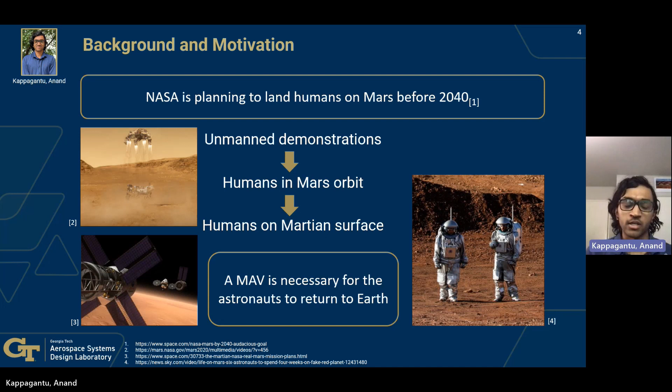A little bit of background and motivation for this project. NASA is planning to land humans on Mars before the year 2040. Prior to that, some of the steps that need to be completed are to show unmanned demonstrations for feasibility proof, and then getting humans into the Mars orbit, and then getting humans from the orbit to the surface. To complete this mission, we will require what's called a Mars Ascent vehicle in order to bring the astronauts back from Mars to the surface of the Earth.

Some of our key stakeholders that we identified are primarily NASA, the scientific community, and ESA, and overall their needs lie around generating crew liftoff capabilities from the Mars surface, having a certain minimum payload capacity, ability to return samples from the Mars surface back to Earth, and communicating between Mars and Earth in order to maintain survivability.

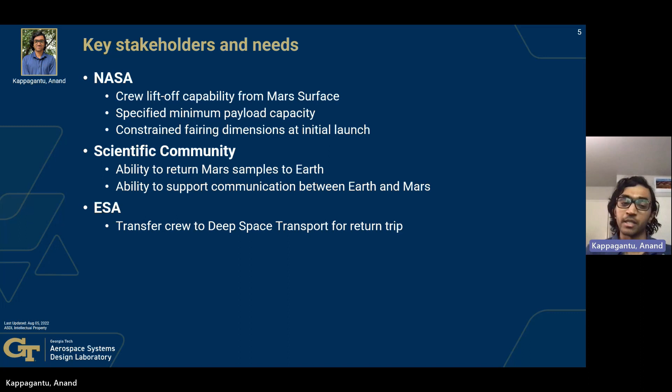Some of the current designs for similar missions that are available: we have the SpaceX Starship, the Lockheed Martin MADV, and NASA's own MAV. Some of the common themes that you'll notice here is they all have in-space refueling, but one major drawback is that they do not have autonomous surface propellant transfer. For this project, we will be focusing on developing an autonomous system for propellant transfer on the Mars surface.

So the way we plan to do this is to take two landers to the surface of Mars that land a certain distance apart from each other. And this would happen 2 years prior to astronauts' arrival on the Mars surface. So we would use that 2-year window to construct a fuel transfer between what we're calling Lander 2, carrying the fuel, and MAV, which will lift off astronauts from the surface.

So here's our concept of operations. We have Lander 2 approaching the Mars Ascent vehicle, which would take about a 6-month window depending on the distance they land from each other, and then build a connection for propellant transfer, then actually transfer the propellant, perform safety checks, and separate the landers before it goes into dormancy mode, waiting for the astronauts to arrive. These phases can be monitored from mission control on Earth.

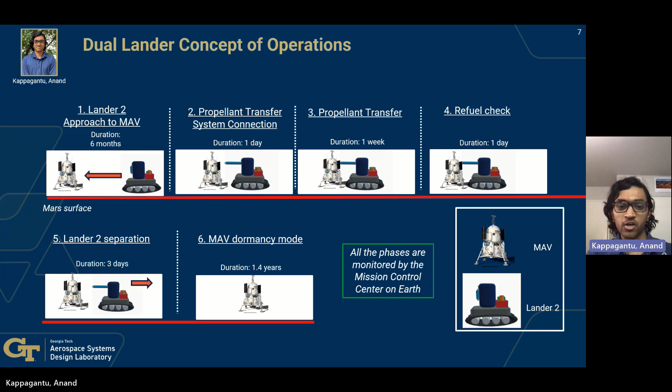To support our decision, we followed a systems engineering methodology to identify requirements, draft out QFD findings, identify potential solutions, trade off solutions, and make our final decision. You will see all of these steps covered through the presentation today.

Some of our high-level requirements that I would like to touch on are here in our requirement flowdown diagram under mission specifications. The key ones here are our payload capacity needs to be able to carry 2 crew members off of the surface of Mars, and the Lander 2 needs to be able to travel to the Ascent vehicle and transfer fuel, and we would like to keep them both under a combined weight of 25 metric tons.

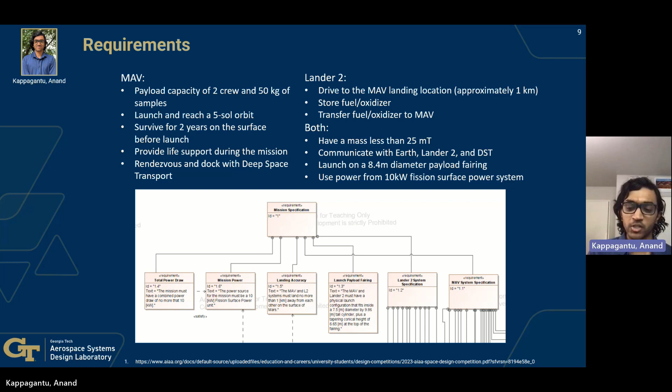So our functional breakdown helps us understand the differences between the Ascent vehicle and the lander. Our Ascent vehicle will need to be able to launch off the surface of Mars, carrying 2 astronauts, and then dock with deep space transport. Our Lander 2, on the other hand, will carry the propellant and transfer the propellant and will not launch off of the surface of Mars.

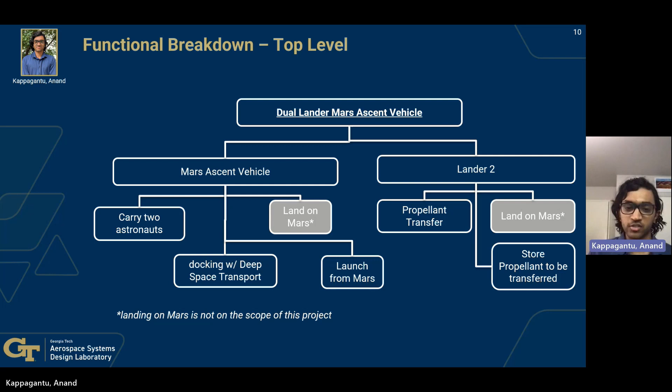Our functional flow diagram here shows the operations of what will happen through the mission. Once the 2 landers have landed, Lander 2 will move to the MAV and transfer the propellant. And then upon propellant transfer, the MAV is waiting for the astronauts to arrive. Once the astronauts arrive, it will receive them and provide life support for them through the launch until it is able to dock with deep space transport. And then once the docking is complete, transfer the astronauts to the DST, and the mission would be complete.

Now I'm going to pass it off to David to talk about our QFD.

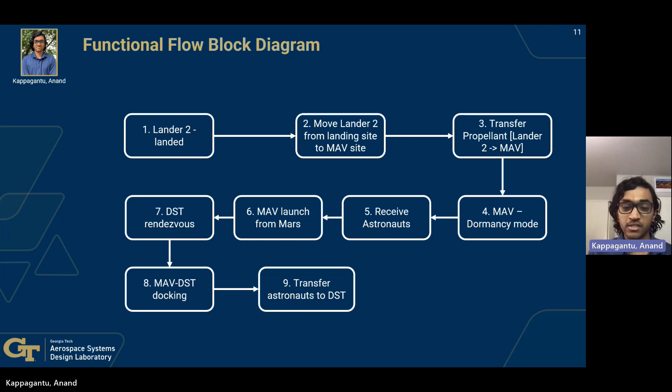Hi, my name is David Hermanns, and I'll be presenting on our mission and design's quality function deployment, as well as our mission and system level design requirement diagrams. We developed our design in conjunction with the AIAA Undergraduate Team Space Design Competition RFP. The RFP explicitly stated engineering characteristics that translated to Room 2 of the QFD, and other requirements were found in NASA Strategic Analysis 2021, or SAC 21, Human Mars Architecture papers.

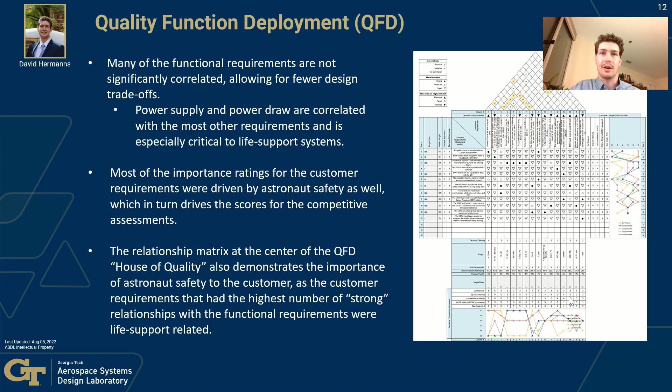Many of our functional requirements are not significantly correlated through our QFD, which allows for fewer design trade-offs, but our power supply and power draw are correlated with many other requirements that are especially critical to life support systems. This is also reflected in our QFD's importance rating for our customer requirements.

For the QFD technical competitive assessment, we compared 4 alternatives against our set of requirements and our own design. We compared the SpaceX Starship, the Lockheed Martin MADV, the NASA Unmanned MAV, and the Blue Origin HLS systems. The SpaceX Starship and the Blue Origin HLS systems performed well against life support related requirements, but like other competitors, they were too large and had too large of a power draw as well.

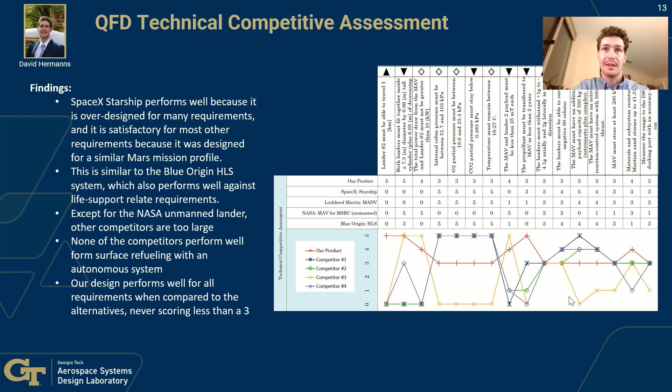None of our competitors performed well either with surface refueling with an autonomous system. Our design performed the best for all requirements when compared to the alternatives on average, never scoring less than a 3, while other requirements scored as low as 1s and 2s.

For the QFD customer competitive assessment, we compared the same 4 alternatives against our customer requirements and our own design. Again, the SpaceX Starship performed well because it's over-designed for the current Mars mission profile, and as in the technical comparison, our competitors' designs were too large and too heavy. The NASA unmanned system does not perform well for astronaut and NASA safety requirements either.

Our product scored an average of 3.91, higher than any of the other averages from the competitors' designs. This, along with our technical competitive assessment and our technical importance ratings, demonstrates that our system is properly designed for the mission profile, especially when taking into account astronaut safety and human life support systems.

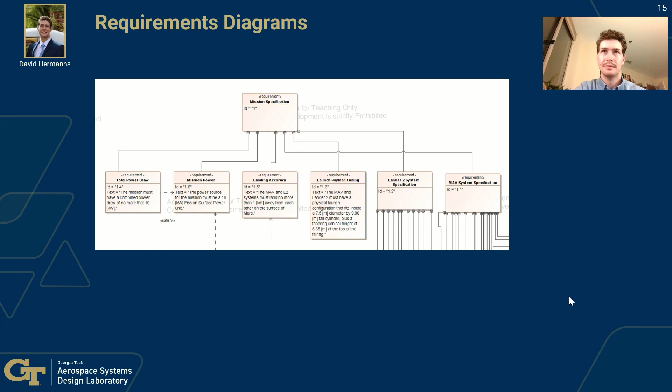For our requirements diagram, we designated our top-level requirement to be the 2-lander mission as a whole. From there, we identified 4 mission-level requirements and allocated all other requirements to either the MAV system or the Lander 2 system. This breakdown of system-level requirements allowed us to meet the customer-defined requirements from the AIAA RFP paper, as well as meet industry standards and external stakeholder requirements for safety and science as well.

As previously discussed, this slide shows the system-level requirements breakdown for the MAV system. The MAV system takes on most of the responsibility for the human life support requirements, as well as return of the astronauts and samples from the surface of Mars to the deep space transport. Each of the identified subsystems also carries with it a set of subsystem level requirements, not shown here.

For example, under MAV ECLS subsystem, we have the subsystem level requirement: the MAV ECLS subsystem must maintain internal cabin temperature between 18 and 27 degrees Celsius, which is derived from the MAV crew support system requirement for the overall MAV subsystem.

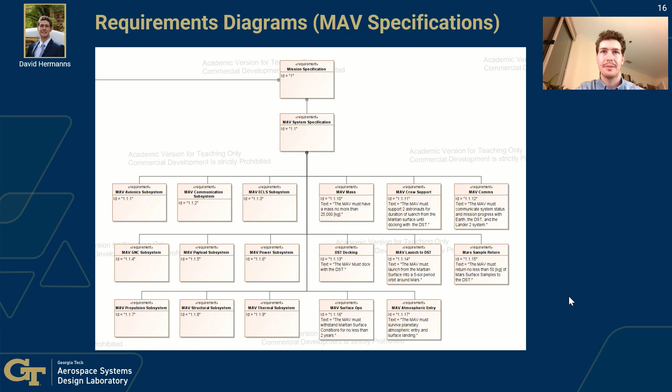Additionally, under MAV structural subsystem, we have the requirement defining that the MAV structural subsystem must have a docking ring such that astronauts and materials can be transferred between the MAV and the DST, which helps meet the requirement DST docking, ID 1.1.13.

A similar structure occurs for the requirements diagram for the Lander 2 system. Many of the requirements regarding fuel transfer, power generation, and system movement were levied on the Lander 2 system, as evidenced by requirement 1.2.11 on the right.

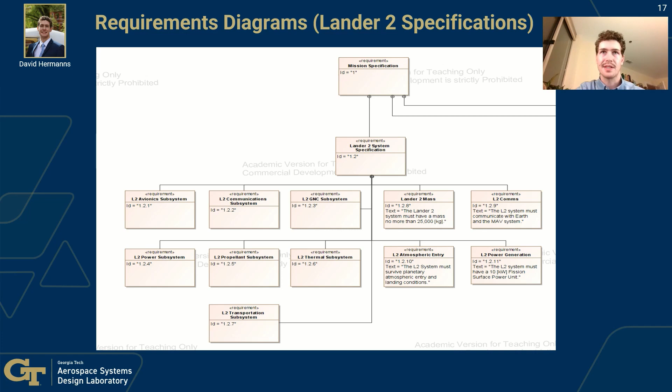The Lander 2 subsystem also has subsystem level requirements that help satisfy mission requirements, such as the L2 GNC subsystem requirement that states the L2 GNC subsystem must capture imagery of terrain around the L2 system as a whole for the purpose of route planning, which allows us to move the Lander 2 subsystem.

Thank you, David, for your presentation, and I will continue talking about the Lander 2 subsystems. So the first 4 subsystems that we have here are the avionics, communication, GNC, and thermal.

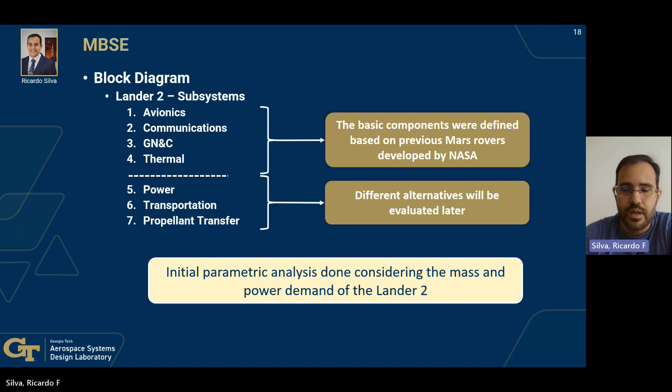Those subsystems were defined based on previous Mars rovers developed by NASA, and the last three, the power, transportation and propellant transfer, will be evaluated later considering different technologies. We have done an initial parametric analysis considering the mass and the power demand of the Lander 2, and using Cameo (MagicDraw), we have created a block diagram for the Lander 2.

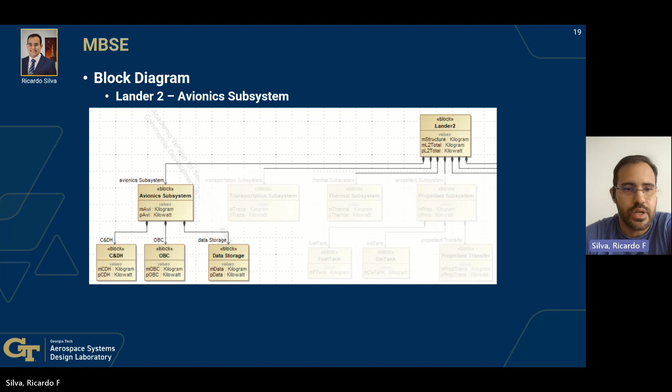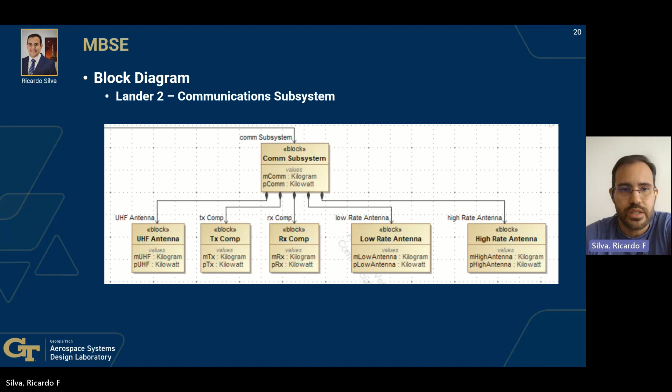For the avionics subsystems here, for example, we have the command and data handling, the onboard computer, and the data storage. For the communication subsystems, we are assuming that it will have a UHF antenna, transmitter, and receiver components, low rate antenna, and high rate antenna.

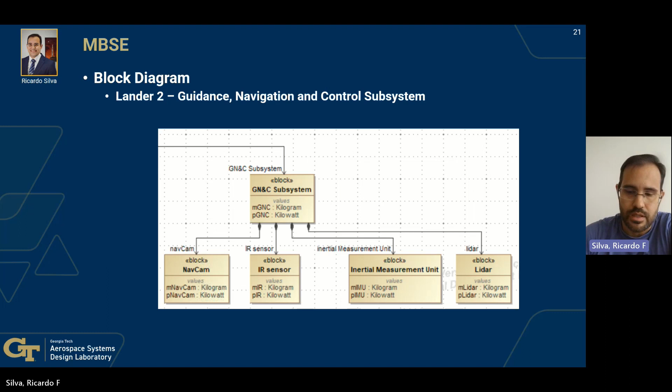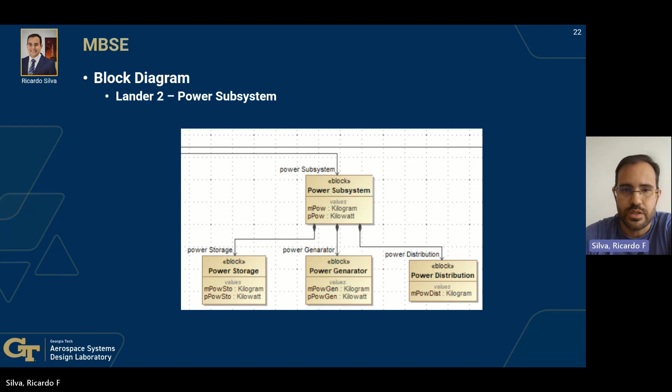For the guidance, navigation, and control subsystems, our lander will have navigation cams, infrared sensors, inertial measurement unit, and the lidar. For the power subsystem, we have here only the function because we will talk more about the elements considering different technologies, as I said. So we assume that we have power storage, generation, and distribution capabilities. And the last subsystems are the transportation, thermal, and the propellant subsystem.

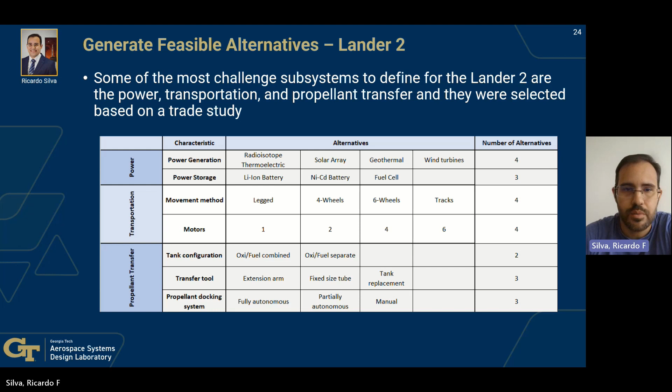So we have identified some possible technologies that we could use to generate power, store power, for the transportation and the transfer, as shown here on this table. We have created four possible alternatives of the Lander 2, combining those different technologies. After that, we have implemented a TOPSIS technique to make a decision and select the best alternative between those ones.

And we have used different criteria such as weight, power storage efficiency, reliability, and transportation compatibility to identify the best alternative. And to do this, we have used weights for those different criteria, and some of them should be maximized and some of them minimized.

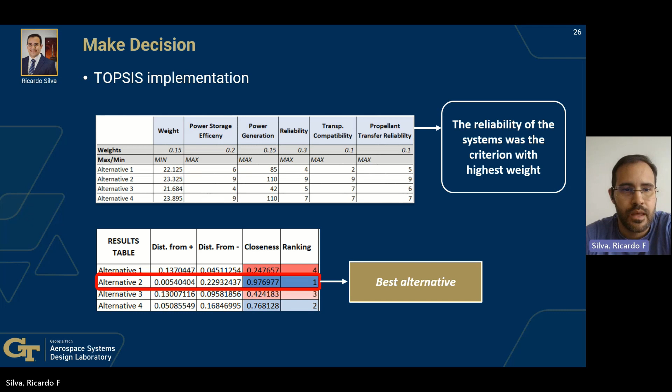After that, alternative 2 was the best one, and this alternative uses a radioisotope thermoelectric generator for power generation, and lithium-ion batteries for power storage. To move the Lander 2, we'll use tracks with four motors. For the propellant transfer subsystem, we will have oxidizer and fuel combined in one large tank, but internally the oxidizer and the fuel will be separated.

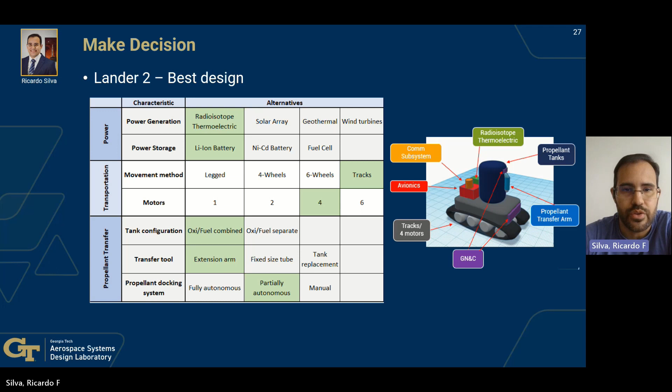The transfer tool uses an extension arm, and the propellant docking system that will connect the landers will be partially autonomous because before the final connection, the mission control on Earth will do a final check to guarantee that everything will work properly. All right, thank you, Ricardo.

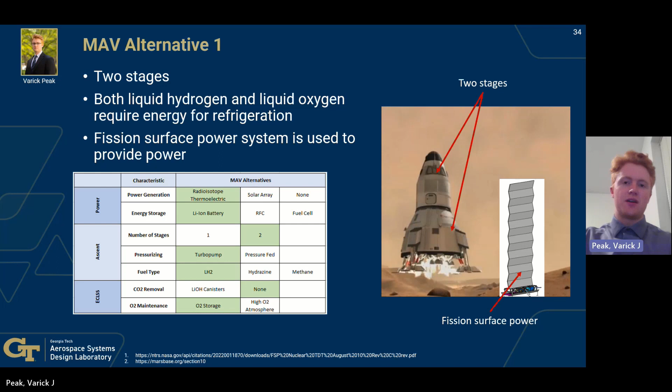So now that we've looked at the Lander 2 alternatives and made a decision, we are now going to look at the Mars Ascent Vehicle alternatives and perform the same process. For the first alternative, the vehicle has two stages and it is fueled with hydrogen and oxygen. Now, both of these have to be stored as a liquid, so the refrigeration systems will require a decent amount of power in order to stay operating. So for this, the fission surface power system is used to provide the necessary energy.

For the second alternative, it is again two stages, but this time hydrazine is used as the fuel. That means that only liquid oxygen needs to be stored and kept cold with refrigeration, so a much smaller PV cell array system can be used. Hydrazine is a good fuel in this case because it can easily be stored at room temperature, which is around the temperatures that Mars experiences. This design also does not use turbomachinery, and the engines are instead pressure fed, which saves on weight and complexity.

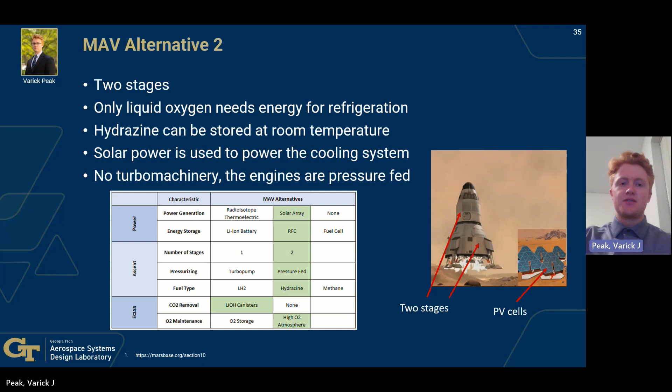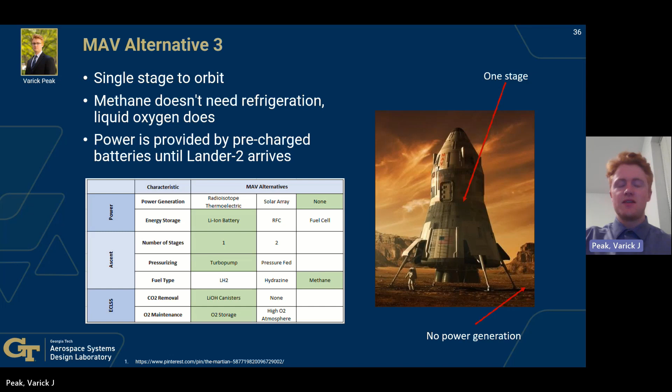For the third alternative, this is a single stage to orbit, and instead of hydrazine, in this case, methane is used. So again, this doesn't need refrigeration, only liquid oxygen does. In this case, the lithium batteries will be pre-charged, and the power for the refrigeration system will be from the lithium-ion batteries until the Lander 2 arrives. At that point, the Mars Ascent Vehicle can then attach to the fission surface power system and use the energy from that. Again, methane doesn't need to be refrigerated, and it is very easy to store. So now we are going to evaluate the alternatives.

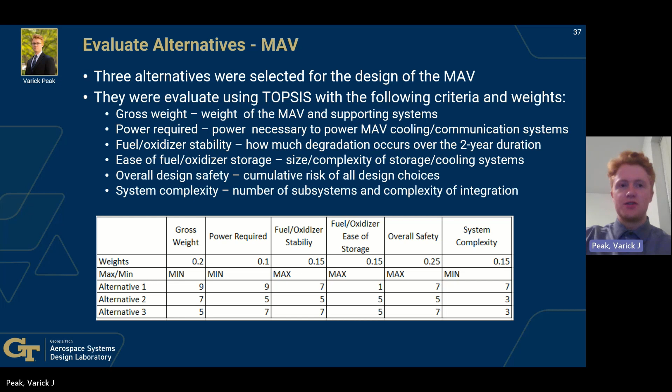The ease of storage is another consideration, as refrigeration and just storage of liquid hydrogen in general is more difficult than some of the other options. The overall design safety is obviously very important, and it has actually the highest weight of all of the criteria. And finally, system complexity. So that looks at turbo machinery versus the pressure-fed system, as well as 1 and 2 stages and some other smaller factors.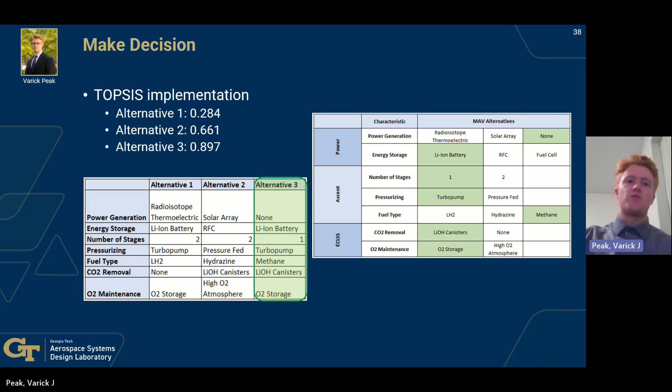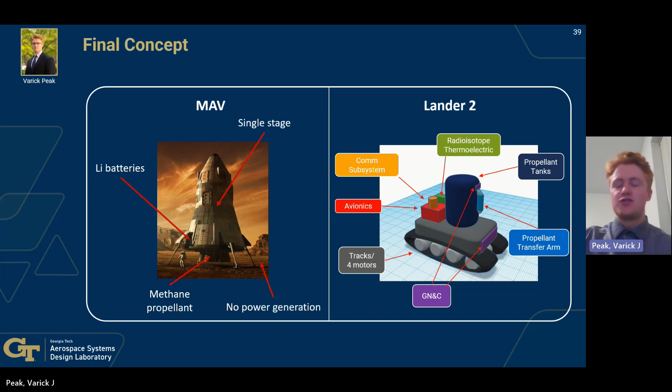So they were evaluated, and you can see that the third alternative actually performed the highest. So this was the closest to the ideal solution, with alternative 2 not far behind, and alternative 1 did not perform well because of all of the weight and complexity of the system. So looking at the final concept, as you can see, we have the Lander 2 design that Ricardo talked about. So that has the radioisotope power system, and it uses tracks with 4 motors. And then the Mars Ascent vehicle is single stage, it uses methane, and there's no power generation.

So looking at the features in depth, the lithium batteries are a good alternative because they're a lot lighter than the power generation systems. Methane is a very stable and easy fuel, and it also has a lot of thrust. For the single stage, this is easier because of the lower Martian gravity, and again, it is less complex than 2 stages, as you need the first stage to separate in order for the launch to be successful.

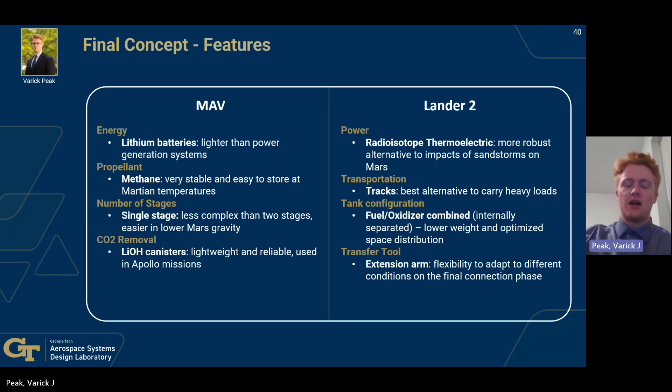And then looking at the Lander 2, this uses the radioisotope power system. This is consistent to provide power whether it's day or night and whether there's a sandstorm or not. The tracks are the best for the transportation because they are good at carrying heavy loads through the Martian soil. And for the transfer tool, the extension arm was used because this has the ability to adapt to different situations depending on how the rover and the lander will actually be oriented.

So now looking at some risk management. So these are some of the risks and our strategy to mitigate them. In many space projects, failing to meet cost is a very common issue. And so we are going to have a strict financial management plan, and we will have very conscious budget tracking and reviews every month to try to remain under the budget.

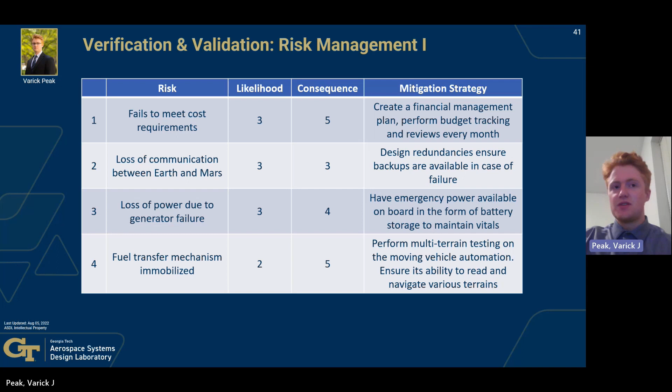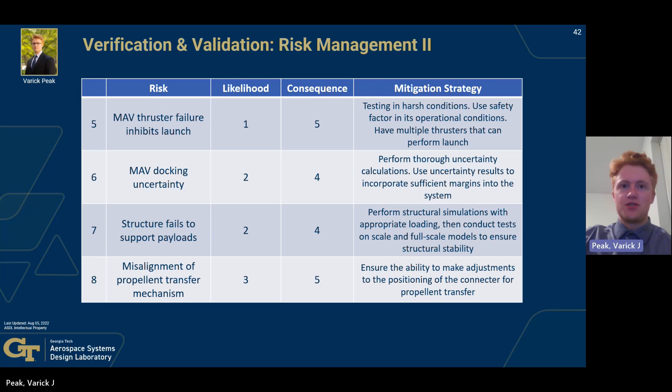One of the biggest issues will be the fuel transfer, as this has never been done before. So of course, we will have to do very rigorous testing in lots of different conditions and lots of different configurations to ensure that the system is resilient. Looking at some more risk, of course, the thrust failure would be very bad for the astronauts if they cannot leave the surface. This is always a worry with thrust systems, so we will, of course, perform lots of testing and make sure all of the components are as reliable as possible to hopefully ensure the launch will happen and happen successfully.

So in conclusion, sending humans to Mars is a very difficult challenge, and there are a lot of technologies that we will currently need to develop in order to meet this challenge. And of course, one of the important aspects of this is bringing humans back from Mars and returning them to Earth. And for this, a Mars Ascent vehicle is necessary.

So our Mars dual lander design fulfills all the stakeholder requirements that were set out for us to bring the astronauts back from Mars. And this is designed better than the previously looked at competing designs, and it is better suited to the mission. So it is the better choice to look at than the competitors.